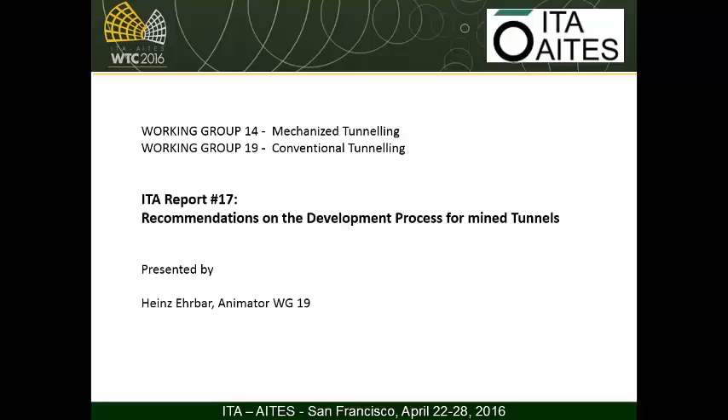At the occasion of the World Tunnel Congress 2010 in Vancouver, we were thinking about new projects, also with ITA Working Group 19, and the question was which tunneling method should be applied in a project: mechanized or conventional, or what are the most important criteria?

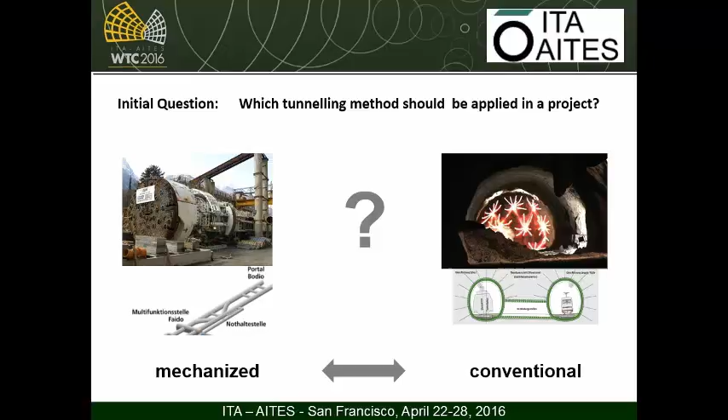Very soon we saw that we can't relate this question only to one single project or to an entire project. As you know from your experience, many projects use both methods within the same project, as you can see on this slide from the 2nd Avenue subway project in New York. In blue color you see the TBM drives, in orange color caverns, in green color the conventional drive, and cut-and-cover drive. So in many complicated projects we utilize all the different excavation methods.

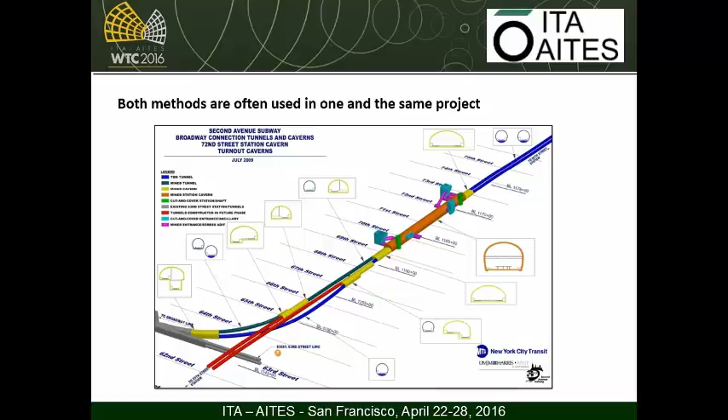Then after 2010 we started with our project. ITA Working Group 14 proposed a short table with the pros and cons of the different excavation methods or tunneling methods, and we saw quickly that it is not possible to answer this question on a few pages.

We agreed that we would like to start with a common project, and we did it at the occasion of the World Tunnel Congress in Geneva, and the first draft was discussed in Iguazu. Then later on we had already a nearly final draft at the last World Tunnel Congress in Dubrovnik, and finally we have it now printed and ready.

Our general report starts with the general analysis of the different project requirements. The list of the requirements is by far longer than only the so-called magic triangle of project management: quality, costs and time. It's pretty obvious that the ground conditions, but also geometrical restrictions, logistics...

Mainly in the form of the accessibility of the site, but also occupational health and safety, environmental aspects, for instance, ground vibrations due to the drill and blast method, can have a major impact on the selection of the tunneling method.

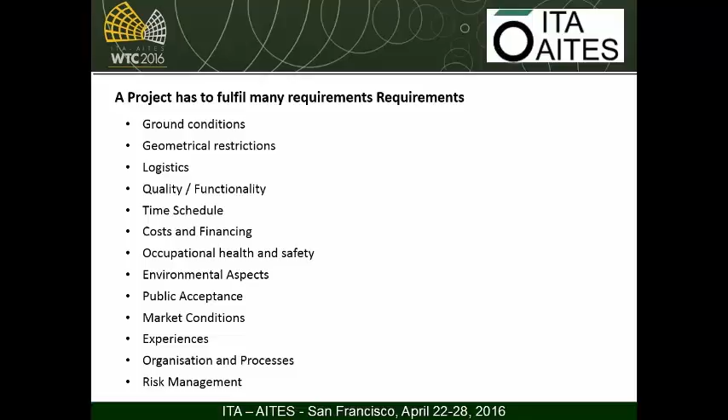The definition of measures to fulfill these project requirements depends strongly on the individual project phase. In some cases, the selection of the tunneling method can already be done in the earliest project definition phase, but in many cases it can be done only during the further design phase.

And if the owner has no compelling reasons for the selection of the tunneling method in the design phase, he should tender both methods, or tender one method and allow contractors alternatives for the second tunneling method. In our report, we have certain tables where you can find the details on this.

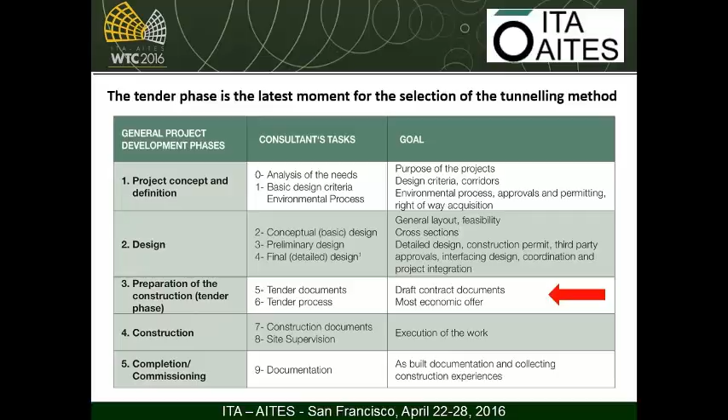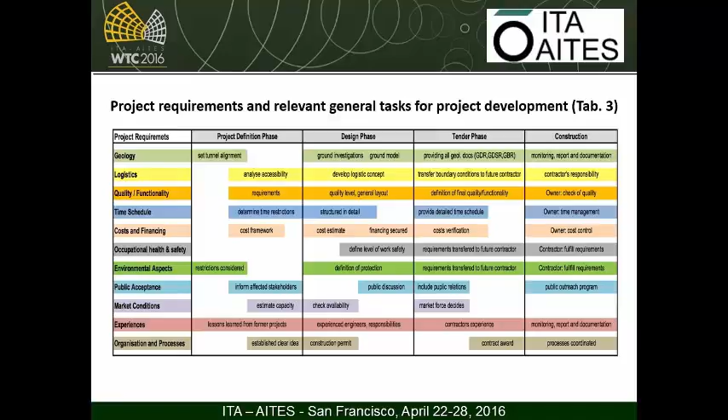The relevant tasks in the selection process are shown in Table 3. This is maybe a little bit small to read, but you have a better table in the printed version, or at least you can read it a little bit better. It should be the guideline for the activities of the owner and his representatives - what should be done on the requirements of geology, logistics, and all the project requirements depending on the different project phases. Based on this table, also the content of the report is created in the following way.

We have a short glossary, and the most important chapters are chapter 4 to 8. In chapter 4, we have a rather long description of all the project requirements, and later on we go into the details of these project requirements in chapters 5 to 8. So chapters 5 to 8, you can understand only if you read chapter 4 before.

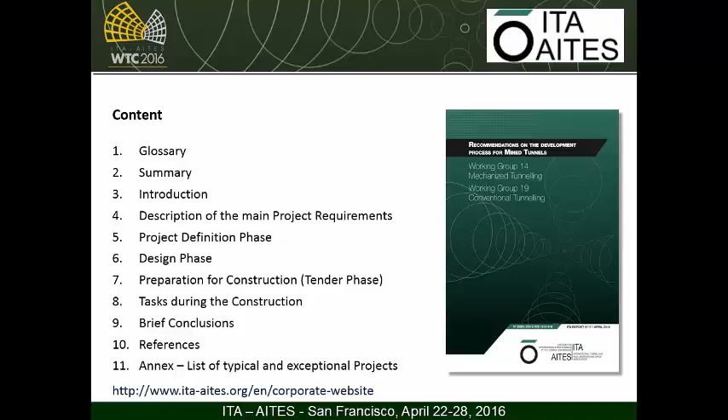This is the basic information on the selection of the tunneling method, or on the requirements. To whom shall this report be addressed? It's quite clear: to all the project partners, the owners, the design engineers. Our report was mainly written with the design-build model, and then the engineering geologist and the contractor.

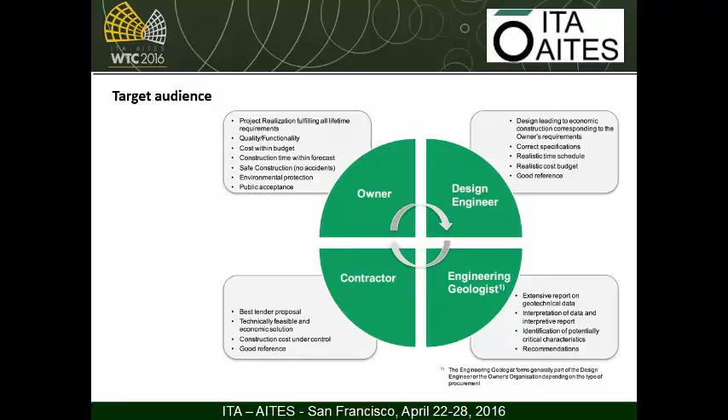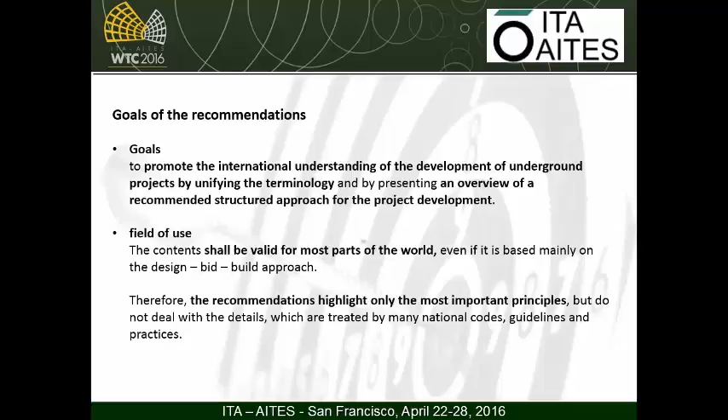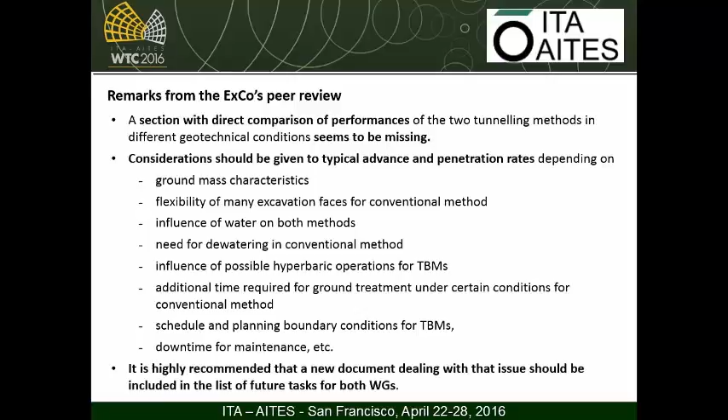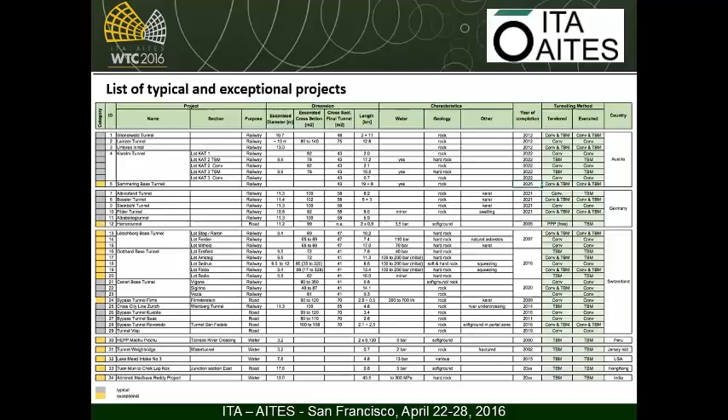And included in the report is a small list of such projects, typical and exceptional projects from both methods, and this may be the basis for future work.

Thank you. Thank you, Heinz.

The second presentation is by Timo Leitnen from the Excavation Activity Group, ITAtech Activity Group. He will talk about vibration control in urban drill and blast tunnels. The subactivity group is quality drill and blast tunneling.

Thank you, Tarcisio. Ladies and gentlemen, good morning to all. And thank you for your interest in this topic that I'm proud to present - this document prepared by ITAtech. As mentioned by Tarcisio, it's the activity group excavation, and within excavation, which is a large topic itself, we have a sub-activity group called quality drill and blast. The topic of this paper is vibration control in urban drill and blast tunneling.

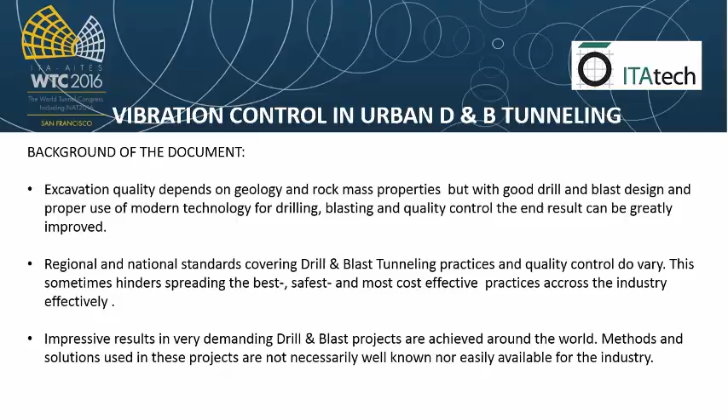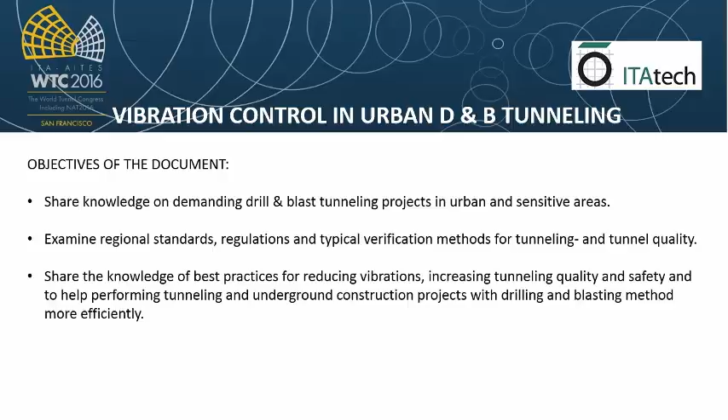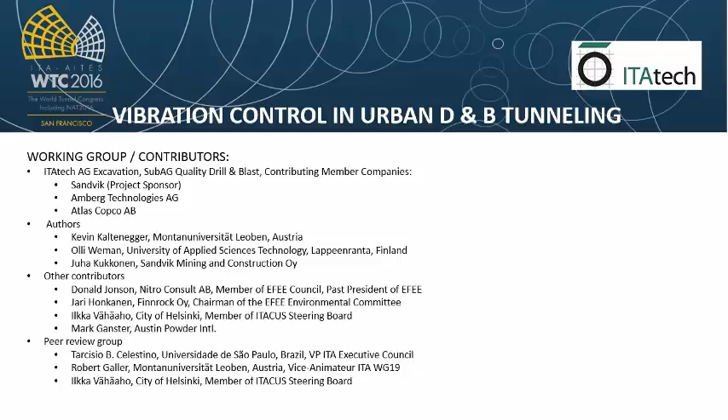For the literature study part of the document, where we looked at regional standards within Europe, we considered trying to reach that globally and get an understanding of regulations globally, but we thought that was too big a task at this point, so we just looked at the different standards in Europe. Students from Leoben University and from Lappeenranta University of Applied Sciences worked intensively on their thesis work to help with this, and Juha Kukkonen from Sandvik was facilitating this part of the work. We also had a number of other companies contributing, and peer reviewers from the ITA family, all experts in this field.

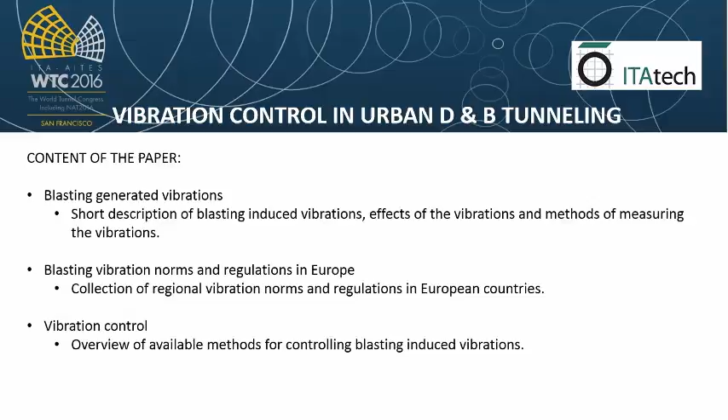Very shortly, the content of the paper: the first part covers blasting generated vibrations, with a short description of blasting induced vibrations, their effects, and methods of measuring these. This is about a 20-page document, and about half the pages summarize different vibration norms and regulations in Europe. The last part, which I believe is the most important and interesting, is how to control the vibrations, with a brief overview of available methods for controlling blasting-induced vibrations. In this document we did not yet include a comprehensive description of available technologies for this, and that's what we are thinking to continue with.

The paper is here. I have a box of these. I'll place the box next to the door, so those interested can pick up a copy of this after this, and then we are thinking of continuing to phase 2, where different technologies to help with this and control these vibrations are presented comprehensively.

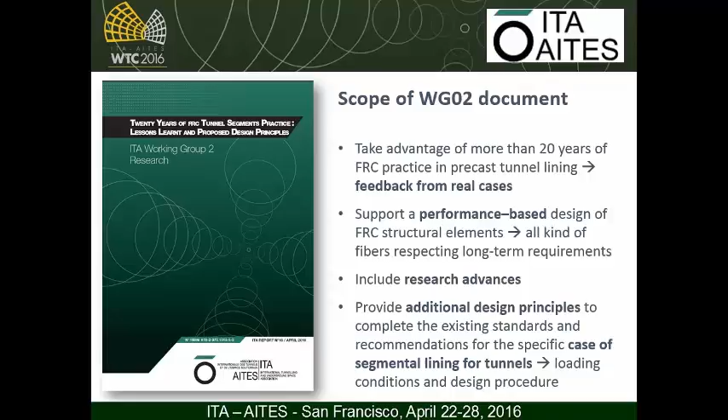We want to include some research advances and provide some additional design principles specific for segmental lining, as far as loading conditions and design procedures are concerned.

So why fiber-reinforced concrete? Well, we probably all know that fiber-reinforced concrete enhances the resistance to crack development through the post-cracking strength. It considerably increases the toughness of the composite material, and it can allow optimizing the reinforcement for diffuse stress, combined with traditional reinforcement bars where high localized stress occurs. And this with the addition of very limited quantities of fibers.

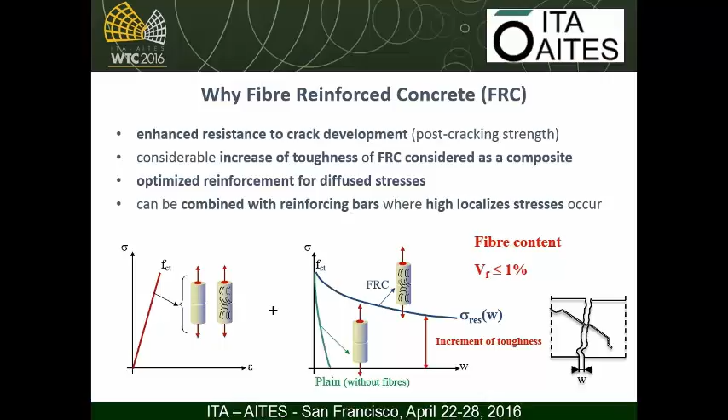The key factor for such success, the growing use of fiber-reinforced concrete in segmental lining, precast lining for tunnels, is mainly the enhancement of the general structural behavior.

So it allows a stable development of the splitting cracks, a reduction of the stirrups placed in the most solicited areas, and a possible or complete replacement of the shear reinforcement.

It also allows an improvement of the industrialization process. The time is optimized in shaping, handling, and placing the rebar, so we have an optimization of time in production, and also less space required for storage and less waste.

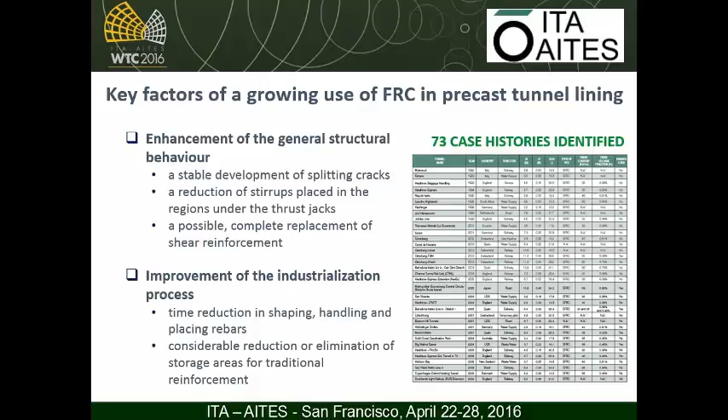And this is really clearly the result of the feedback that we got from the case histories that we have collected. We have collected a total of 73 case histories in the use of fiber reinforcement, as fiber only or hybrid configuration, so fibers plus traditional rebars.

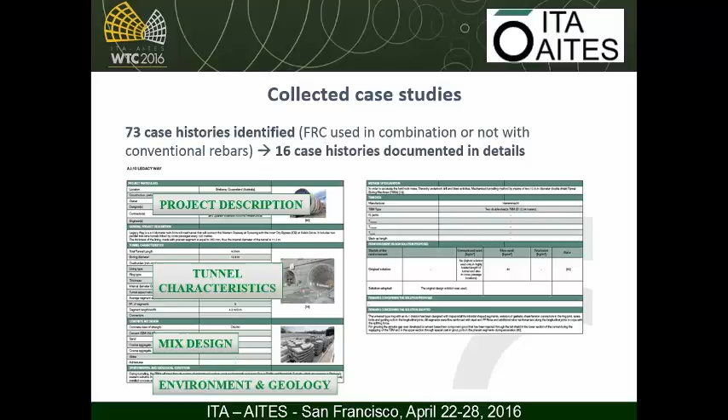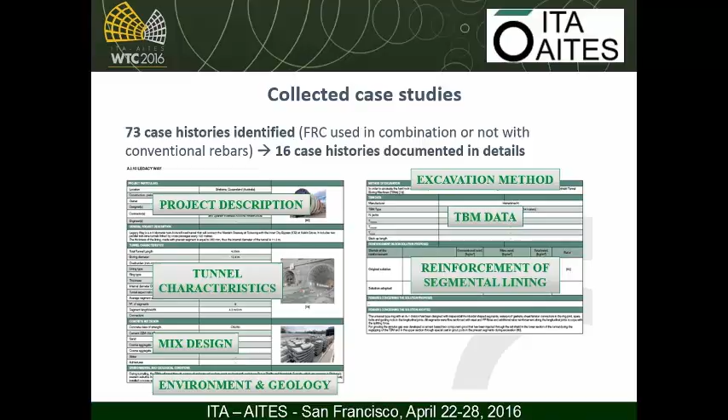And for 16 of these case histories, we have very well documented the project. You can find the project sheets at the end of our publication. For each project sheet, we have the project description, the tunnel characteristics, the mix design of the concrete, the environmental and geological conditions, the excavation method defined, then the TBM data, and the reinforcement of the segmental lining.

The result that we can see from these 73 cases that have been collected is that in the majority of these cases, fiber only were used, and the applications have been spread across all kinds of diameters, even big diameters more than 10 meters. Actually, selecting and choosing between a fiber-only solution or a hybrid solution is a matter of the load conditions, the geotechnical conditions, and the specific project case.

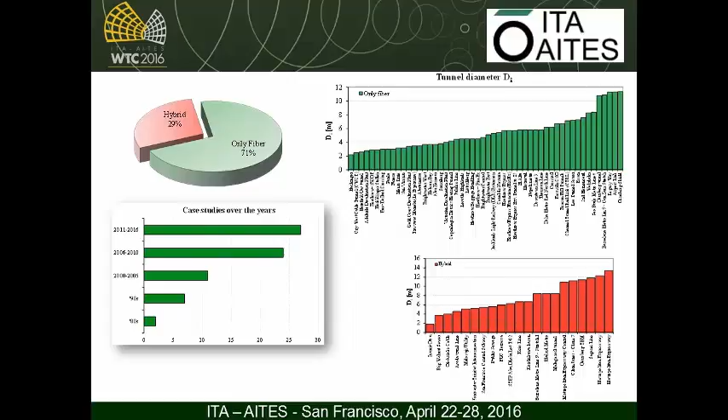What we have also observed is that the use of fiber-reinforced concrete has dramatically increased in the last decades. So the question we asked ourselves was, are the existing recommendations sufficient?

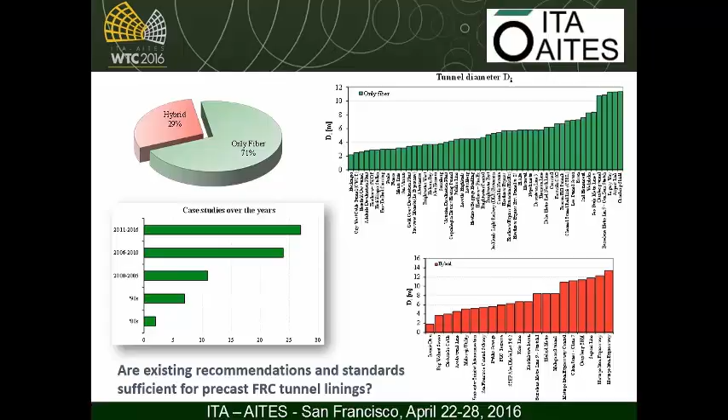So we went through the existing recommendations, and according to our analysis, there are 3 groups of existing recommendations: those focused on the material behavior that can be characterized on small samples, those related to the behavior of general structural elements like slabs and beams, and few recommendations and standards that deal with the case of tunnel lining, a specific application for tunnel lining.

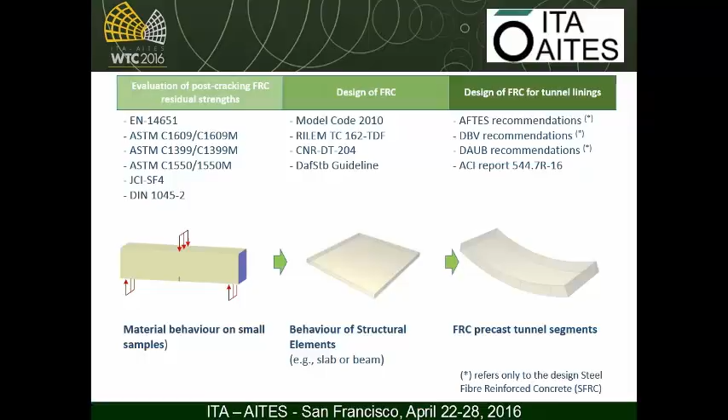But 3 out of them are specifically for steel fiber reinforced concrete, and the ACI is the most comprehensive. Still, we thought that we could add something according to recent developments of research.

To give you an example of what kind of information we want to share among the industry and the engineering community in tunneling: there is a need for additional specification for these particular structural elements, the segments, because they undergo specific forces, especially during, for example, the thrusting phase of the TBM.

In this case, we suggest taking a deep look at the local behavior and the global behavior. The local behavior of the single element, the single segment, to analyze the tensile transverse stresses, but also the global behavior of the different segments in the lining.

This is especially important when fiber only is used, because according to the research, we feel that irregularities of contact between segments can have an important impact on how stress is distributed and how the fiber-reinforced concrete behaves. So we suggest that nonlinear numerical analysis and experimental tests are also used.

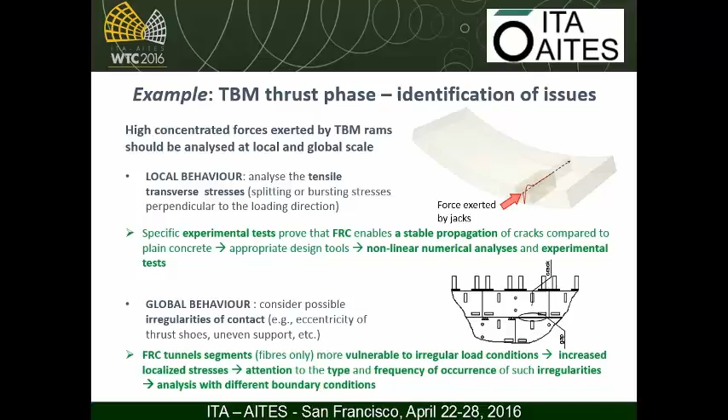That specific sensitivity analysis is done for the case of irregularities. For example, the procedure we suggest is that we start with nonlinear numerical analysis on simple 2D models that can give us, in the elastic field, the initial ratio of reinforcement needed.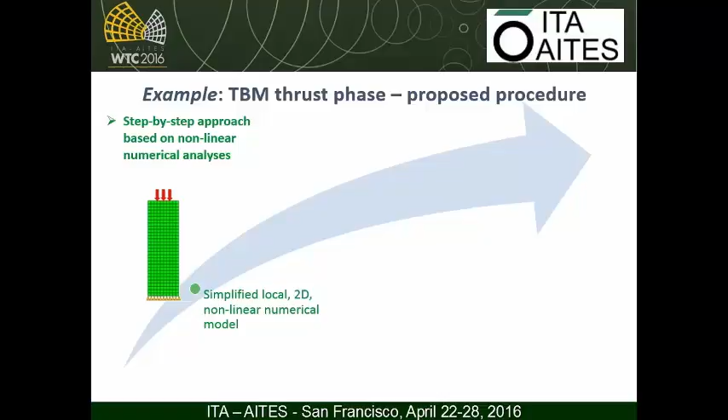Then we pass to a more complicated numerical model, 2D always, but in which we can simulate the loading condition and its variation. We can simulate the irregularities and imperfections that can occur during construction, and then we go through the 3D numerical model as the last step. We really recommend that the three steps are followed, and that we don't start immediately with 3D numerical modeling.

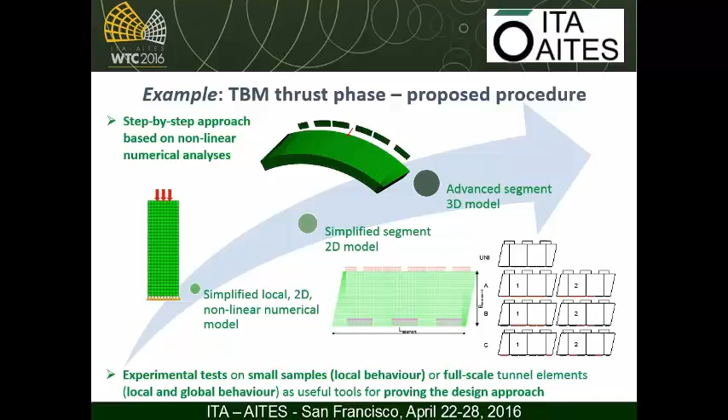And then, of course, experimental tests on small samples or full-scale tunnel elements for studying the local and global behavior are a useful tool for proving our design approach, not for substituting it.

So, working group number 2, thank you for your attention.

Thank you, Elena. Next presentation is by Christoph Eberle from the sub-activity group on precast fiber-reinforced concrete segments. It's very nice that we have two reports released at this time on this issue, which address different aspects of the same subject.

Christoph? Thank you very much, Mr. Chairman, ladies and gentlemen, good morning. My name is Christoph Eberle. I'm pleased and proud to represent the ITAtech sub-activity group dealing with precast fiber-reinforced concrete segments here today.

I'll also talk about the content of our current guidance document, which you can download from the ITA website. It should be online now. Well, who are we?

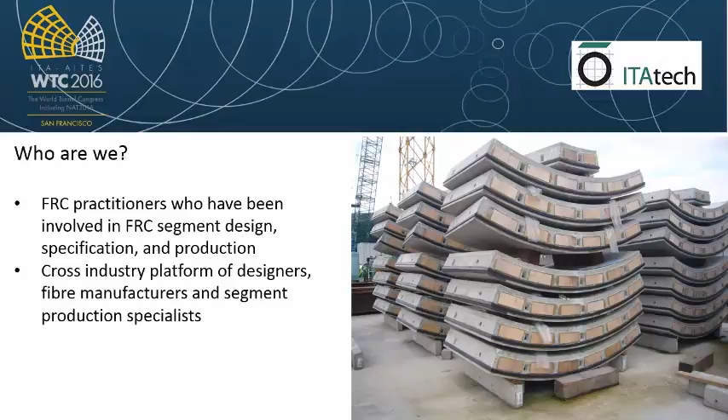So what exactly are we doing in our sub-activity group? Well, here we produce the guideline, the guidance document. In a nutshell, this is about making our experiences on what works and what doesn't work, as well as what's important and what's not so important in fiber-reinforced concrete segment design, accessible to tunneling practitioners.

What we want to do is empower segment designers to use fiber-reinforced concrete when the conditions are right, but we also want to provide advice on when the conditions are right in the first place. The guidance document we produced is not a textbook, not a standard, and doesn't contain a walkthrough for segment design. It contains relevant background information intended to assist the practitioner to come to his own conclusions on whether fiber-reinforced concrete is the right material for his or her job.

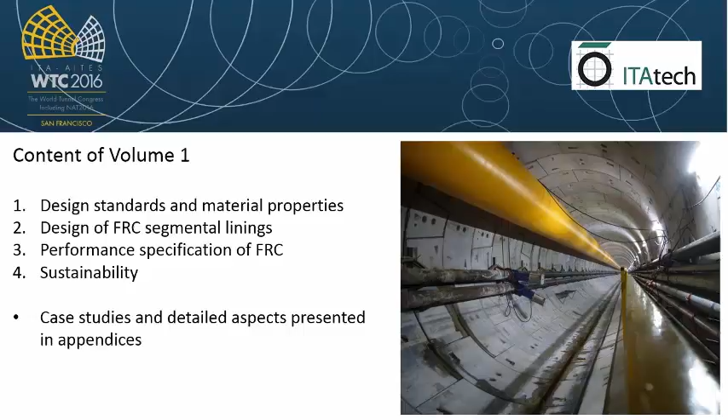So the route we took as a sub-activity group, we decided to set up our document similar to a performance-based specification. So we describe what the fiber reinforced concrete is supposed to deliver, in which situation, and how this can be designed, specified, and tested. But we leave it to the manufacturers to actually provide the product which complies with these performance requirements.

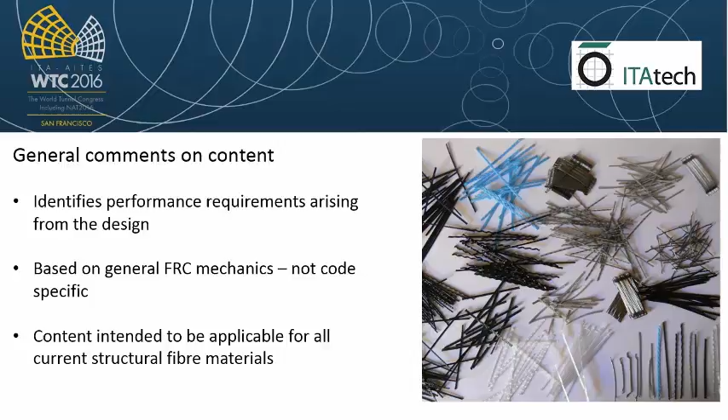So, in consequence, what we hope to have achieved, and what we believe to have achieved, is that the content of this guidance document is relevant for your segment design, regardless which particular fiber or fiber material you're planning to use.

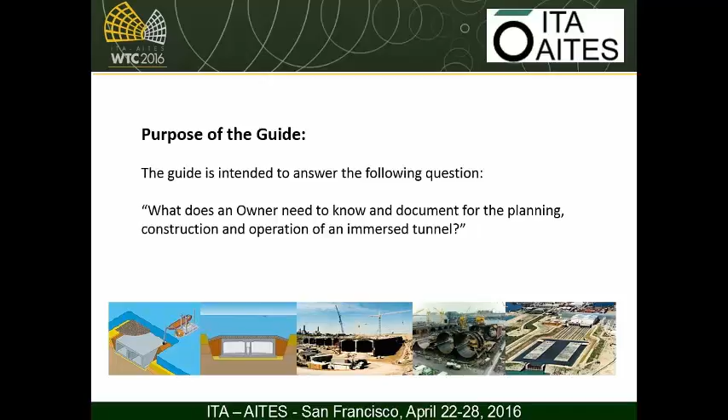So the structure of the guide is quite a simple structure to the document. We have a fairly short front-end document, which is in 4 parts. First of all, we set out our objectives, much along the lines I've just described. Section 2 gives an introduction to immersed tunnels, which sets out the different components of an immersed tunnel project and the different construction techniques that are involved. So at a high level, it gives a first good level of information to someone who's new to the subject.

Part 3 gives an introduction to IDV, that's instrumentation, documentation and verification. This is a systematic approach to capturing information about the tunnel structure or the tunnel crossing, which can be of assistance for later operation and maintenance of the tunnel.

We have a section on when things need to be done, so when decisions need to be made, whether it's during design phase, construction or through operation. We give some information on specifications, what you might expect to see in specifications. We have a section on documentation, so an owner can understand what sort of documentation should be produced through design, through construction and through operation. We give a few expected values in relation to those specifications and behaviour of the immersed tunnel structure, and a section on analysis talking about requirements for design, but that might also include operational stage monitoring.

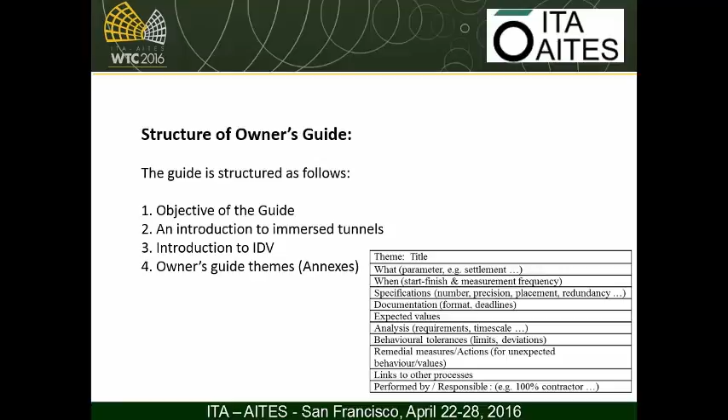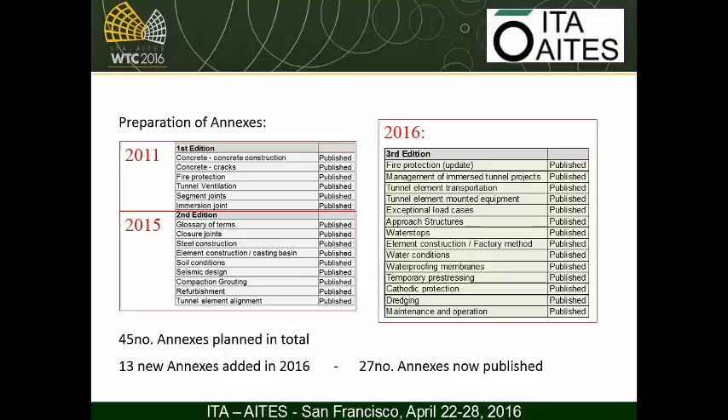I'm going to take you through a few of the annexes we published this year. I won't get into too many details, but just to give you a little bit of an overview as to what this year's publication contains.

We have an annex on tunnel element transportation. For those of you not so familiar with the immersed tunnel method of construction, the tunnel is constructed using precast or prefabricated tunnel elements, and these can be built at a distance remote from the tunnel crossing site. So there's a need to transport them to the tunnel crossing site where they can be immersed down into a trench which is dredged in the riverbed or seabed. That first annex deals with the different methods of transportation and the areas that need to be thought about for that process.

Connected to that, we have an annex on tunnel element mounted equipment. This describes all of the equipment that needs to be attached to the outside of a tunnel element to allow you to transport it and to immerse it down into your dredged trench. So this deals with control systems, measurement systems, survey systems, and guidance systems.

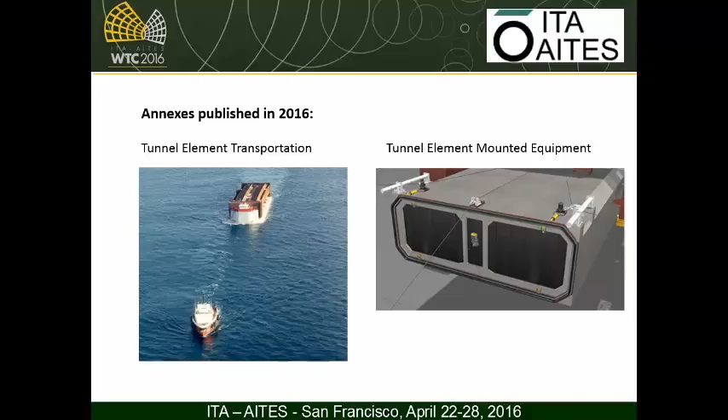We have an annex on exceptional load cases. Because of the nature of an immersed tube tunnel, there are some loadings which need to be considered which probably don't apply for any other form of tunnel. For example, immersed tunnels are at very shallow depth beneath the riverbed or seabed, so we have to think about the influence of sunken ship loading on the roof of the tunnel, ship grounding, and protecting the structure from falling and dragging anchors. So we try to deal with some of the very specific loadings we have to think about there.

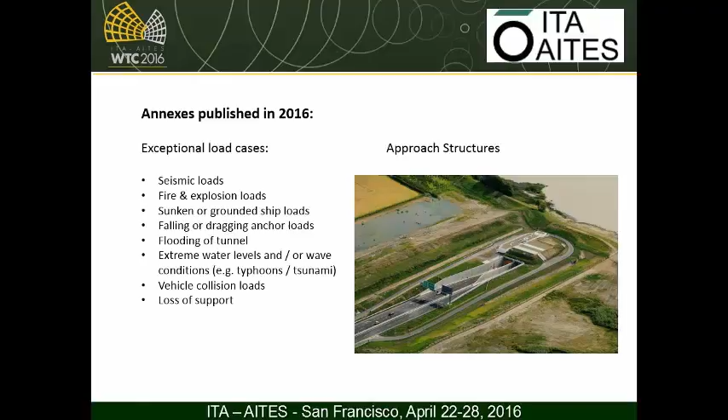We have an annex on approach structures. Immersed tunnels always need to connect to a terminal structure on land, and so that deals with the type of structure and how operational buildings are configured.

We have an annex on water stops. For concrete tunnels, quite often they're built in a segmental form and have a number of joints through the structure, so that gives some guidance on the type of water stops that are common and what's considered to be effective.

There's an annex on tunnel element construction using the factory method. This is a method developed for the Øresund tunnel in the 1990s and has since been used elsewhere. It's a very rapid production process for the tunnel element structures, and it's planned to be used on future projects such as the Fehmarn Belt project between Denmark and Germany.

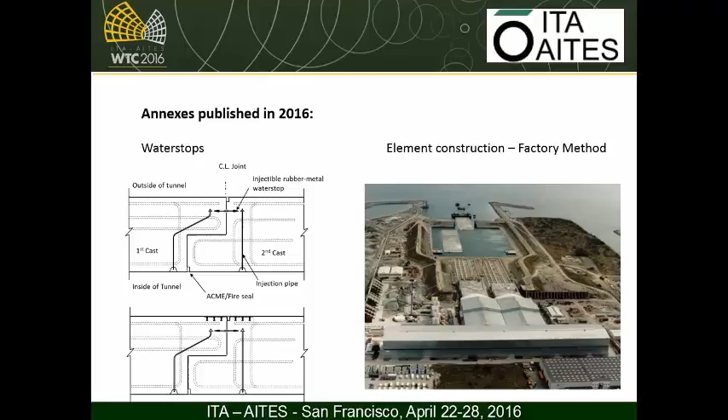We have an annex on water conditions. During the process of transportation and immersion of tunnel elements, this covers all the things that need to be considered in terms of tides, waves, water salinity, and all of the inputs to the planning required for those processes.

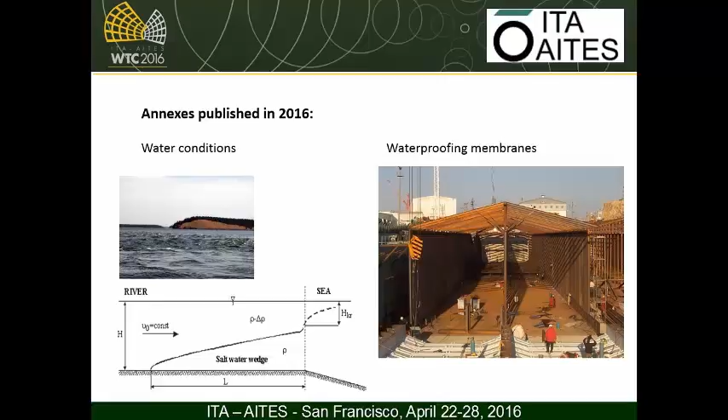We have an annex on waterproofing membranes. There are a number of different ways of making tunnel elements watertight, and for some forms of structure there's an external membrane applied, which could be steel, or a spray-applied or sheet-type product. So we deal with those products and materials and how they should be implemented.

And the last two: we have an annex on dredging. That's a big part of an immersed tunnel project, as dredging is required to form the trench in which to place the elements. So this deals with the different types of dredging equipment, the level of accuracy that could be expected, and environmental protection.

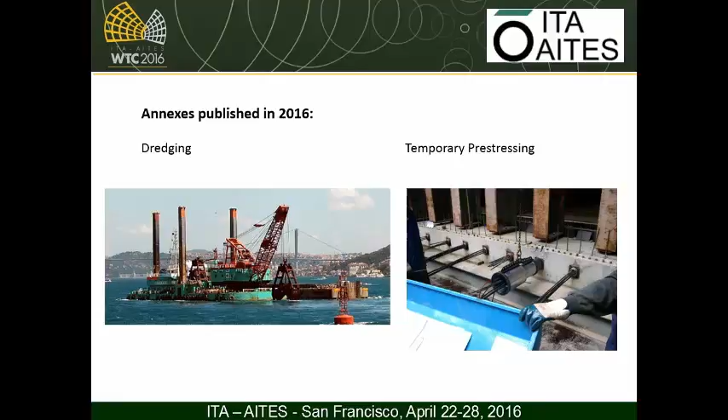And lastly, we have an annex on temporary pre-stressing. For concrete tunnels which are built in a series of segments, they need to be clamped together to form a rigid body so that the tunnel elements can be floated, transported, and immersed. Temporary pre-stressing is the way to do that, so this gives some guidance on how that can be implemented.

Moving on from here, our plan for next year is to complete the final 18 annexes. There's still quite a lot of information to put together, but we're well on the way. We've had contributions from 15 experts around the world, and by the time we finish it will be well over 20. So I need to thank everybody in the working group for their hard work over the past few years in getting to the point we're at.

Just before I finish, in parallel we've also produced an advice leaflet on environmental protection, which is a very important subject for immersed tunnels, so that clients and owners understand how environmental impact can be successfully managed for immersed tunnel projects. So that's it. Thank you very much.

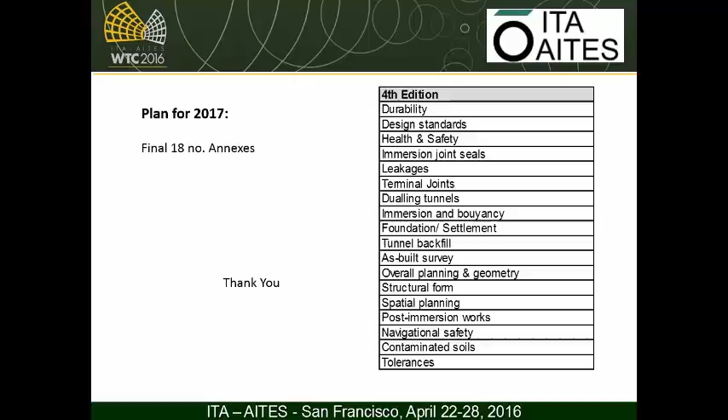I would encourage the audience to go through these reports, which are available at the ITA website. Some of them have important compilations of information, and others have guides which will surely shape the way designs will go on from now on.